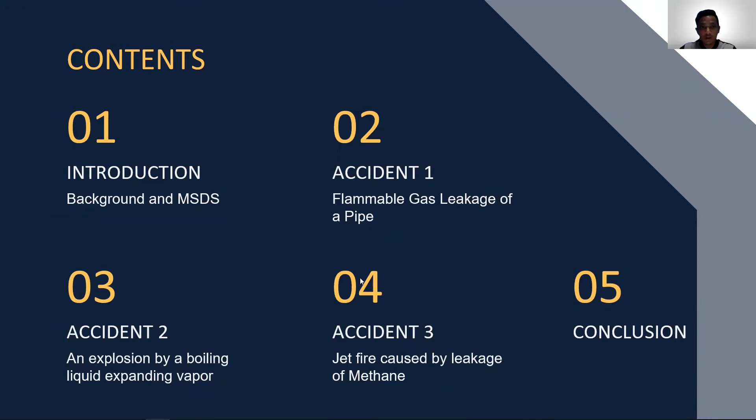These are the contents for this presentation. In the introduction, I'll talk about the overview of the project and some background of the chosen facility, alongside the MSDS, Material Safety Datasheet. Nasser will then continue with the results for Accident 1, flammable gas leakage of a pipe, followed by Accident 2, an explosion by a boiling liquid expanding vapor, by Ammar, and Accident 3, jet fire caused by leakage of methane, by Hassan. Moving to the introduction, this project's workflow is as follows.

We chose an industry facility residing in Malaysia and then did several possible scenarios of release. Simulations were then done using Aloha software to analyze the consequence and risk for each type of release. And lastly, recommendations were suggested to prevent or mitigate the release.

For our project, the chosen industrial facility is Port Dickson Refinery, owned by Petron Malaysia, situated in Port Dickson, Negeri Sembilan. And a little bit of its background: the refining facility was established in 1963 and it provides the Malaysian market with a sustainable supply of petroleum and gas products.

The facility is convenient because it is connected to cities via a strong network of transportation routes, enabling efficient and safe distribution of Petron's premium products. The refinery has a crude distillation capacity of 88,000 barrels per day. It also houses a number of processing units, including distillation unit, reformer, steam generator, and storage.

Its products include gasoline, jet fuel, diesel, LPG, and low sulfur waxy residue, also known as LSWR. Raw materials include crude oil and condensate. In order to analyze the risk involved, we will refer to the material safety data sheet for each of the products. Only a portion of the data from MSDS is shown in the next slide.

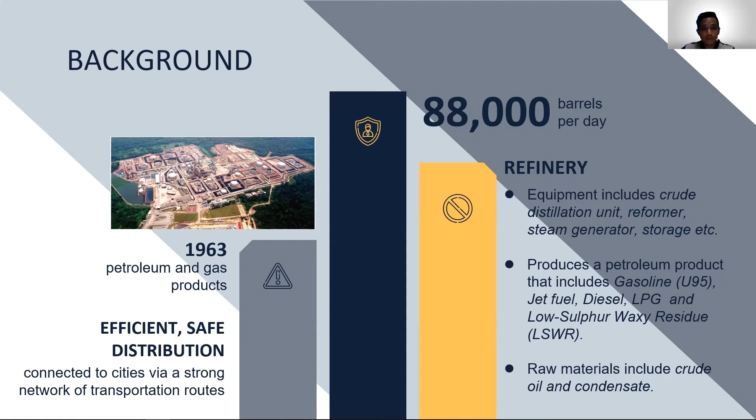For crude oil, it is extremely flammable, both in liquid and vapor state. It causes serious eye irritation and may be fatal if swallowed and enters the airways. As for gasoline, it may cause genetic defects and damage to organs through prolonged or repeated exposure.

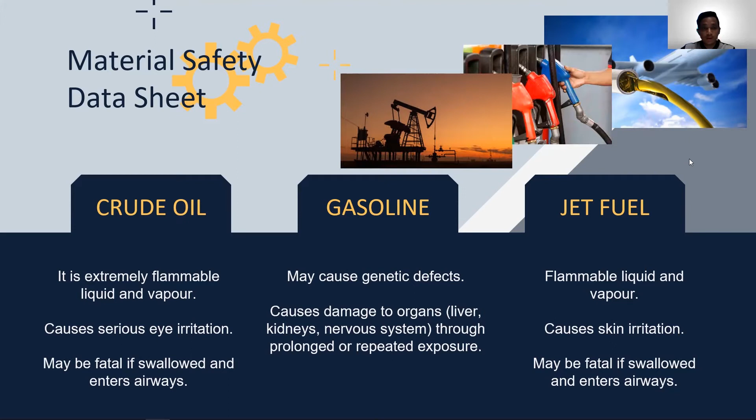Jet fuel has similar risks involved as the crude oil, that is flammable liquid and vapor. It causes skin irritation and may be fatal. For diesel, it can cause drowsiness or dizziness, as well as cancer. It is also toxic to aquatic life.

LPG is an extremely flammable gas, and if contained under pressure, it may explode when heated. For low sulfur waxy residue, the risks are harmful if inhaled and suspected of damaging fertility or the unborn child. Next, I'll pass to Nasser to talk about the results.

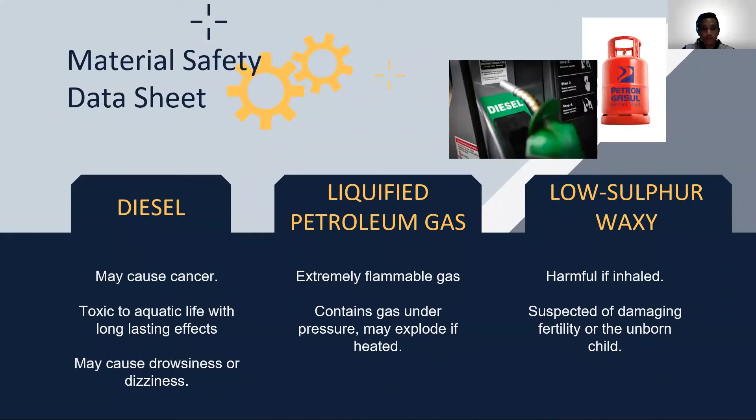Hello. So for the results and discussion, for this project, we set 3 accidents possible to happen in this facility. The first accident is a flammable gas leakage of a pipe, the second one is an explosion by a boiling liquid expanding vapor, and the third one is a jet fire caused by a leakage of methane.

During the designing of these 3 accidents, we tried to diversify the data input, especially for the weather conditions and the type of chemicals causing the accident, and the type of accident in the first place. After designing the input, we used the Aloha software to simulate each of the accidents.

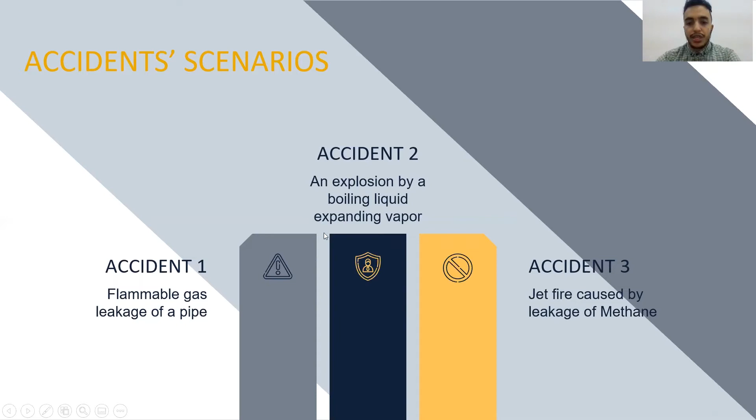Moving on to accident number 1, the flammable gas leakage of a pipe. The accident input for this accident: we set the date and time to be 28th of May 2020, 7:11 a.m. And the chemical would be propane as a replacement for the LPG, since Aloha does not simulate solutions and only simulates pure chemicals. For the weather, we set it up to be cloudy and 26 degrees Celsius.

The relative humidity was 75% and wind speed of 106.7 miles per hour coming from the southeast. For the pipe specifications, we chose a smooth 300 meter long pipe with a diameter of 3 inches, an ambient temperature of 26 degrees Celsius, and 2.3 atm of pressure.

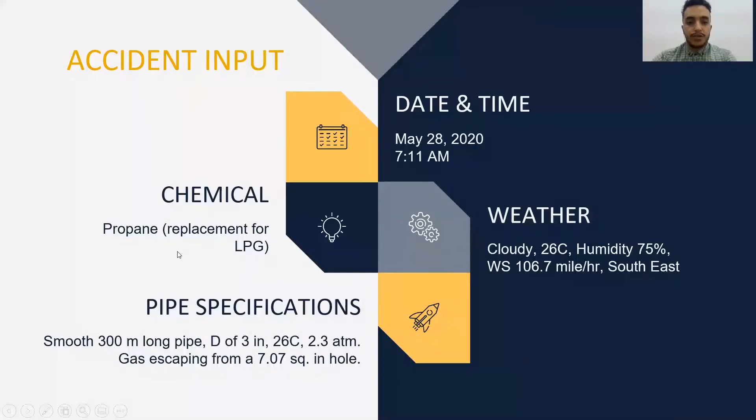The gas escaping from this pipe would be escaping from a hole with an area of 7.07 square inches. The type of output we got from the ALOHA software are two types: the wordy output and the graphical output. For this type of output, we got that this accident will cause a flame that is 10 meters long.

The burn duration will be 1 hour, since we didn't set up any time limit, so the ALOHA software set it up to be for 1 hour maximum. The burn rate is 96.4 kilograms per minute, with a total amount of 2,802 kilograms of the chemical propane that would be burned during the 1 hour time.

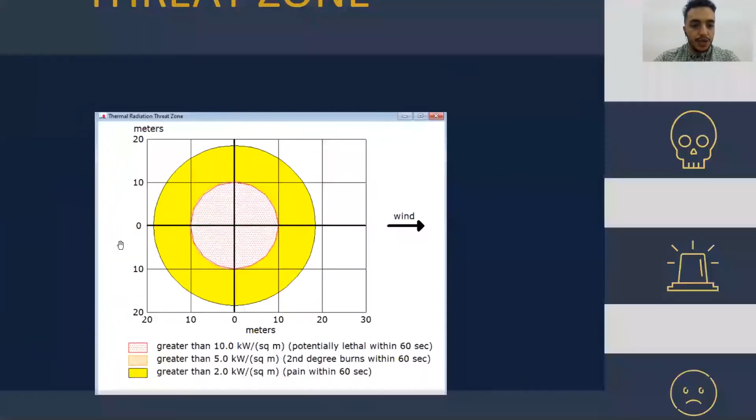This is the thermal radiation threat zone, and it has 3 zones for the accident: the red zone, the orange zone, and the yellow zone. The orange zone is so tiny that it only appears if we zoom in close to the graph. So you can see this is the red zone, this is the yellow zone, and this is the orange zone.

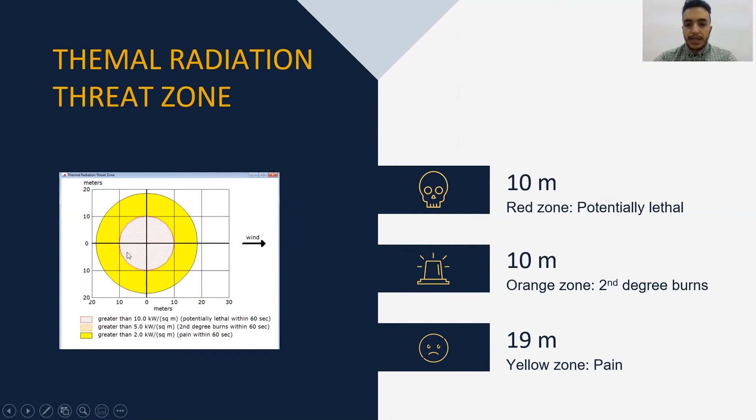For the yellow zone, it will have a diameter of 19 meters, and people inside this area will have possible pain. So the accident only affects a zone of 19 meters, and that is why the simulation, or the graphical map, appears so tiny.

For this type of accident, we set up some recommendations to mitigate them. The first is that pipelines should be constructed, manufactured, and maintained regularly to ensure the safety of the employees and any third parties involved, particularly against any risk of fire and explosion.

Also, the pipeline should be equipped with practical and effective facilities for safe operation, like level controllers, pressure controllers, alarms, and valves. And the pipeline operator should have drawn up and implement an internal emergency plan to ensure that these are reviewed, tested, and revised regularly.

Also, to mitigate any possible external corrosion of any pipe, the underground pipeline should be protected with a suitable coating and cathodic corrosion protection, and the above ground pipe should have a suitable paint layer or coating around them.

Finally, the plant should provide a restoration plan and a cleanup plan of the environment after any accident that might happen, regardless of any possibilities. So this is all for accident number 1, and we will move to accident number 2, which AMMAR will present.

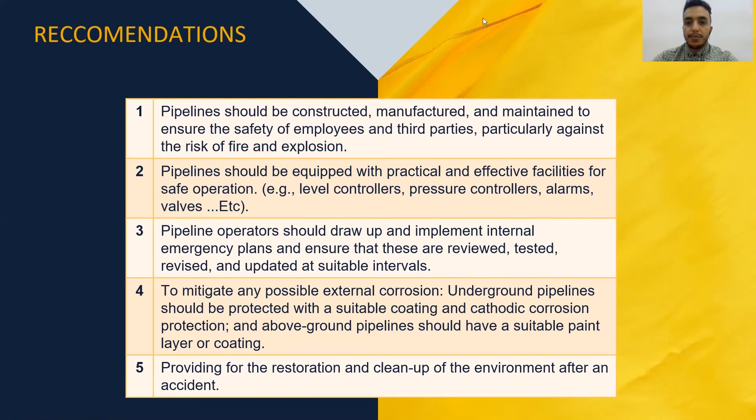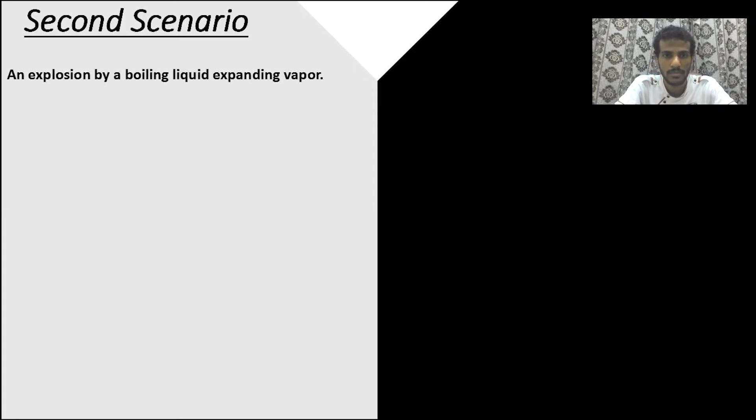Thanks, Nasser. Now let me move to the second scenario, which is an explosion by a boiling liquid expanding vapor. There was a boiling liquid expanding vapor explosion of flammable liquid, benzene, in one of the spherical tanks of the facility. The explosion destroyed the facility completely, with an impact reaching around 800 meters from the facility.

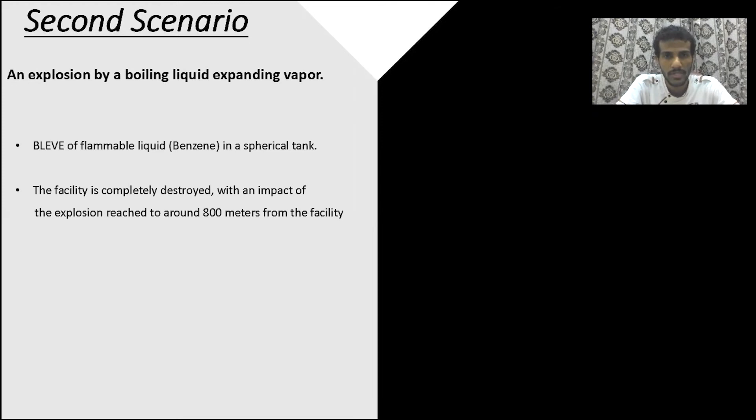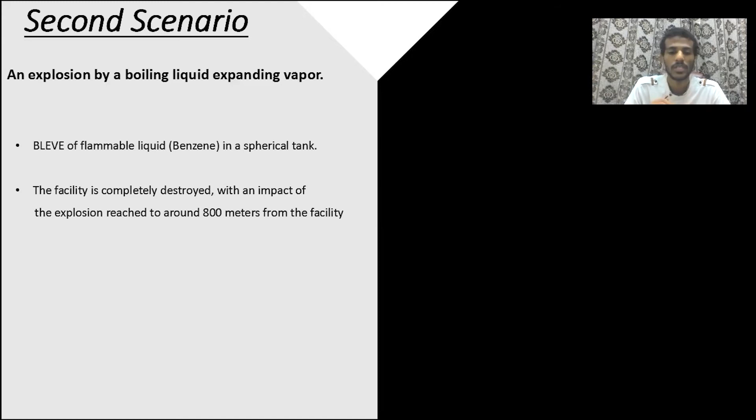From the data we collected, related to the weather on the day of the explosion, as well as the characteristics of the benzene itself and the parameters of the tank, we simulated the condition in ALOHA software, and we got these results. The results were classified into 3 regions depending on the effect during the 60 seconds from the explosion. The first region is considered the red region, measured to be around 348 meters from the facility.

So this region has potential of lethality. Okay, the second region is the orange region. It is measured to be around 493 meters from the facility. This region is considered to be a second degree burn region. And the third region is the yellow region, which is measured to be around 769 meters from the facility. This region has only a pain effect.

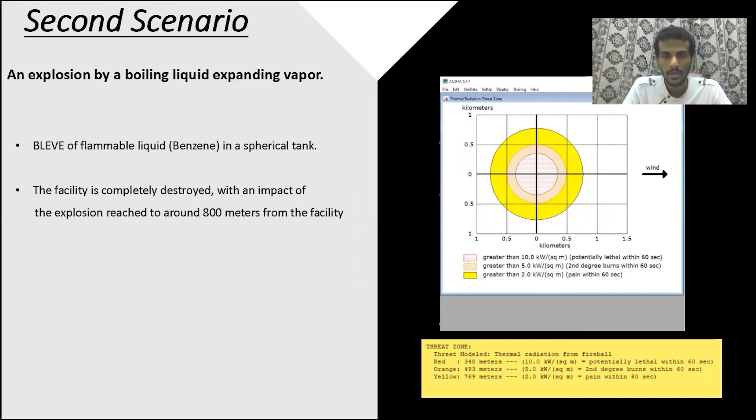So these are the results that we have got from simulating our data in the ALOHA software. So now let me move to the recommendations to mitigate the incident. Actually, there are some recommendations also to prevent this accident from happening, like having an alarm that can help when the temperature exceeds the limits. But since the accident has already happened, I will just talk about the recommendations that can mitigate the accident.

So the first thing is that we have to use PPE, as we know that PPE can isolate the whole body from any possible dangers. So this is very important to take into consideration. The second thing is that we have to evacuate the zone that may be affected by the accident as fast as possible. And the third thing that we have to be careful about is that we have to have firefighters who can control the fire in a short period of time. So that is about the second scenario.

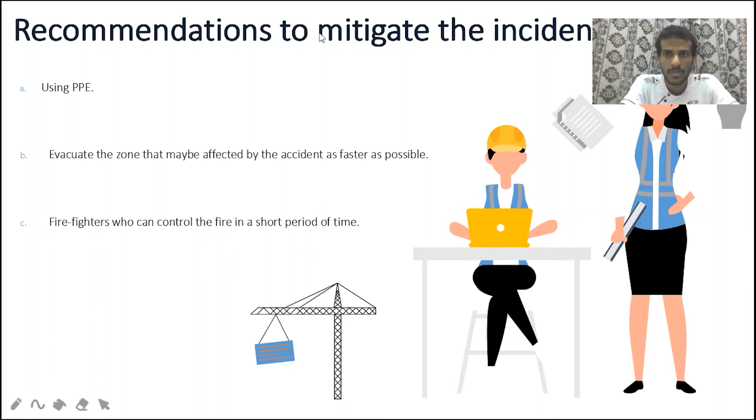Now let me move the presentation to Hassan. So hello and assalamu alaikum. My name is Hassan Majd ABOUZAID. My matric number is 199506, and I'm here presenting about accident 3 for safety class. So the accident is about a leak from a hole in a horizontal cylindrical tank.

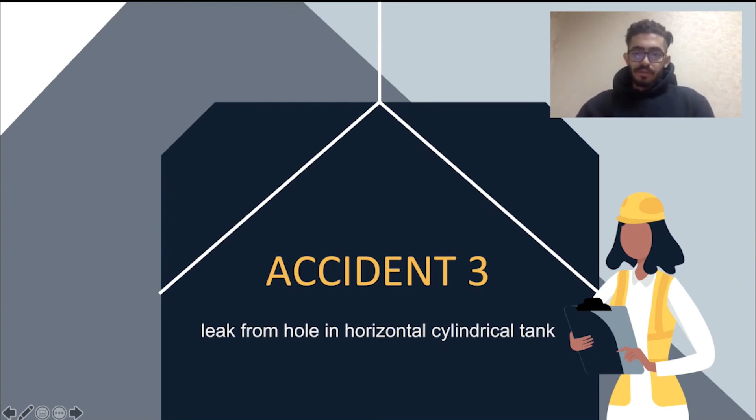So first of all, for the accident input. The date and time for the accident was on 6th July 2011 at 9:08 a.m. The weather that day was windy with 37 Fahrenheit, and the humidity was 5%. The wind rate was 5 miles per hour northeast. The chemical that leaked and burned was methane, leaked from a tank with a diameter of 1 meter and length of 9 meters, and its volume is 7.07 cubic meters. The circular opening diameter was 0.5 meters.

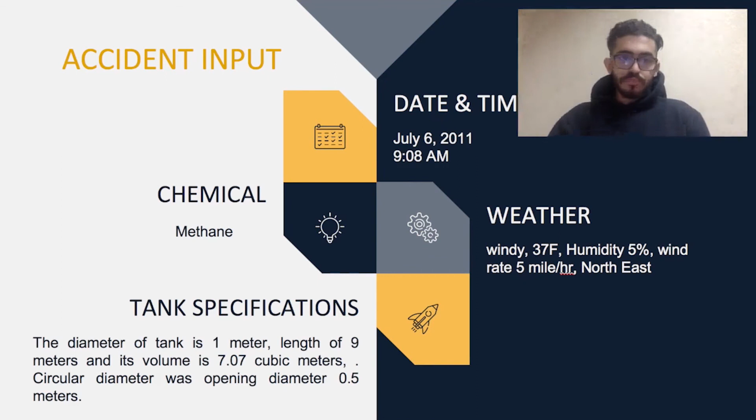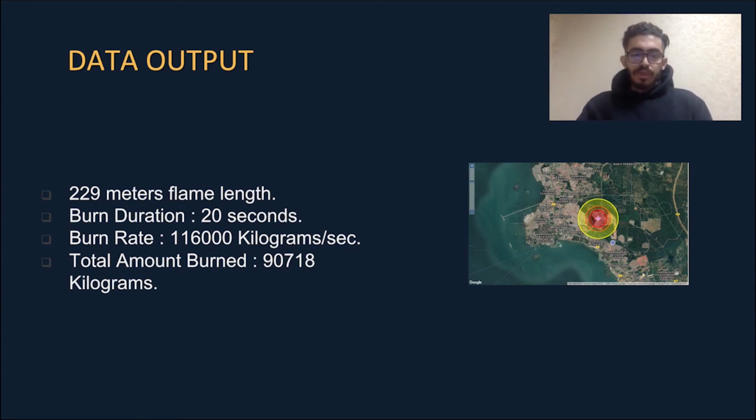So second, for the data output, the flame length was 229 meters and the burn duration was 20 seconds with a burn rate of 116,000 kilograms per second with a total amount burned of 90,718 kilograms. So for the thermal radiation threat zone, the first zone, which is 428 meters from the place of the fire, is considered a red zone with a potential of lethality within 60 seconds.

And the second zone, which is 670 meters from the place of the fire, is considered an orange zone, which can be classified as second degree burns within 60 seconds. And the third zone, which is 971 meters from the place of the fire, is considered a yellow zone, which will have pain within 60 seconds also.

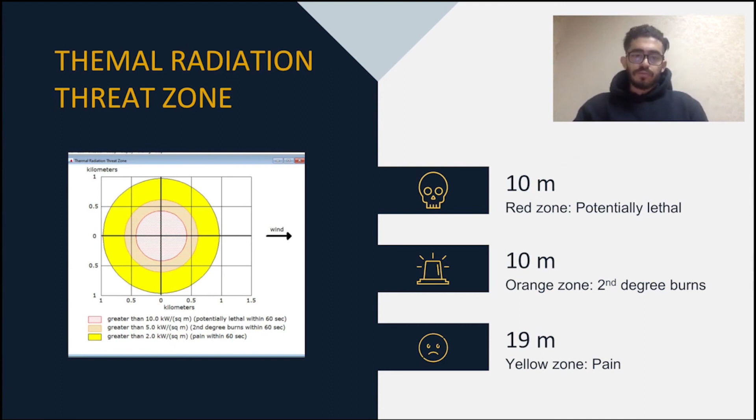So for recommendation and mitigating, first of all we will start with recommendation. Having an alarm system that can check if there is a leak and automatically shut off the system is a good idea to prevent that kind of accident, and also figure out the problem before it happens by asking the person on duty to check the control device regularly. And for mitigating, there are several steps to be taken when having such an incident.

So first of all is to use PPE. Second is analyze capabilities and hazards. Third is have a plan to evacuate the zone that may be affected by the accident. Fourth is the emergency response procedure, which can be planned to control the fire in a short period of time. For example, nearby firefighter cars or firefighting systems that can be designed on the plant. So this is the end of my part, and thank you.